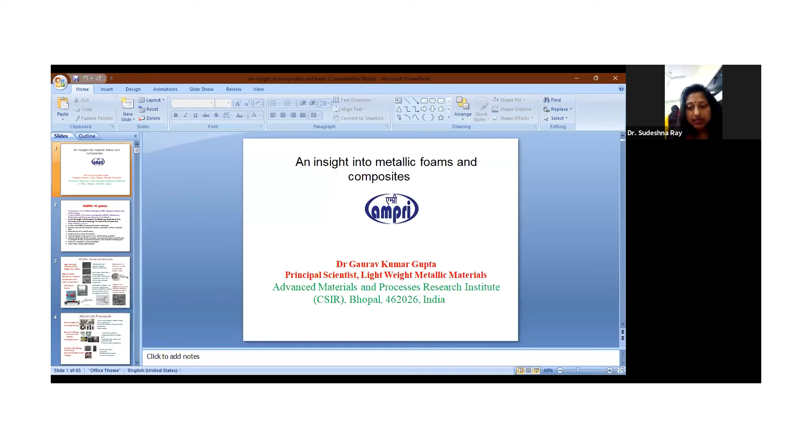So thank you for giving me the opportunity to talk about some of my thoughts amongst all the students and faculties of AISEC Bhopal. So my topic of today's talk is an insight into metallic foams and composites.

So first I will give you some brief about AMPRI. It has been established in 1983 as RRL Bhopal, and in year 2009 the name has been changed to AMPRI, that is Advanced Materials and Processes Research Institute. We have almost 40 scientists, covering all fields: metallurgy, mechanical, civil, and other areas.

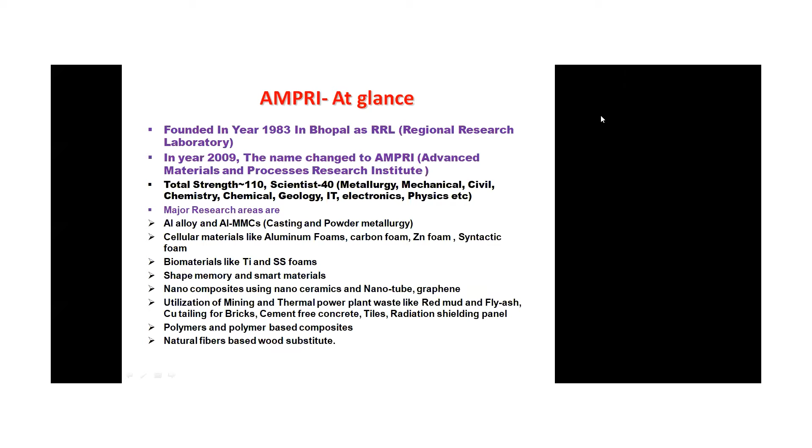The major research area of AMPRI, my department, is basically aluminium alloy and composites by both powder metallurgy and casting. We are working on cellular materials like aluminium foam, carbon foam, syntactic, stainless steel, and others. We are also working on biomaterial foams for biomedical applications like titanium and SS. We are working on shape memory alloys and other smart materials.

Some of the group is working on nanocomposites using nanotubes and graphene. We are also utilizing bulk mining waste like red mud and fly ash, and we are making cement-free concrete tiles and other things. One division is also working on polymer-based composites, and one division works on natural fiber, taking jute and sisal to make wood substitutes. This is a brief introduction of AMPRI.

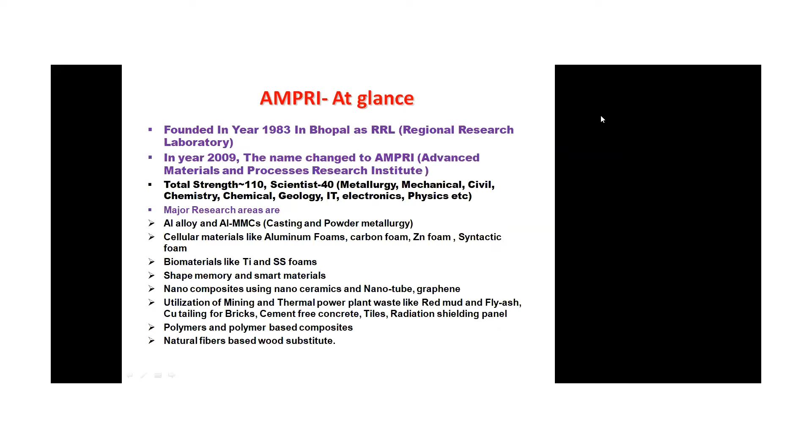Applications of these materials are in the automobile sector, like steering wheel, bracket, control arm. In case of composite, they are brake drum, brakes, connecting rod. In case of foam, applications include crash box, door insert, armor, blast resistance panel. We are already working with some automobile companies to make a composite brake drum for automobiles.

Normally a brake drum is made by the casting route and is made from cast iron. We are replacing it with aluminum composite, and the purpose is to increase crashworthiness, noise and vibration attenuation, and blast resistance property, and most importantly, weight reduction.

Normal cast iron based components have density in the range of 7 to 7.8, but aluminum foam and composite are in the range of even 0.2 to 2.7. The aluminum foam density is in the range of 0.20 to 0.70 gram per cc, and the composite is in the range of 2.7 to 3.2.

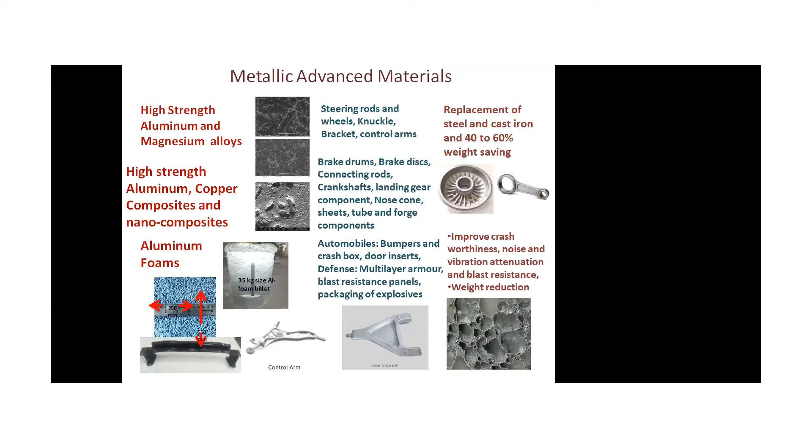We are also working on new processes like electromagnetic forming and joining. One of the colleagues is working on dissimilar metal joining by pulse metal forming, so we can join any two metal sheets which differ in density, differ in Young's modulus, differ in melting point. We can directly join without any heating, just by cold giving electromagnetic force, and then we can join it.

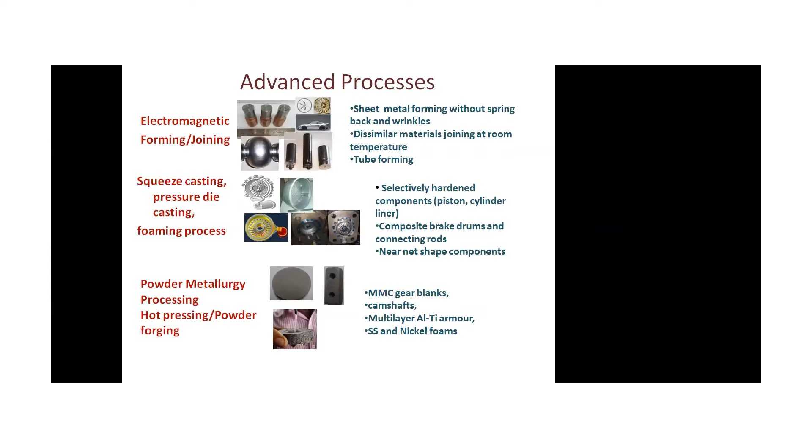We can make many components like wire tubes and many tube forming, and we are also working on making automobile components by squeeze casting and pressure die casting. We are also working on powder metallurgy processing to make components like foam, high temperature foam, armor, and other things.

We are using hot pressing and powder forging technique. We have a very good facility for heat treatment, with expertise for heat treatment of ferrous and non-ferrous materials. And we can also make the deformation mapping of many alloys and composites.

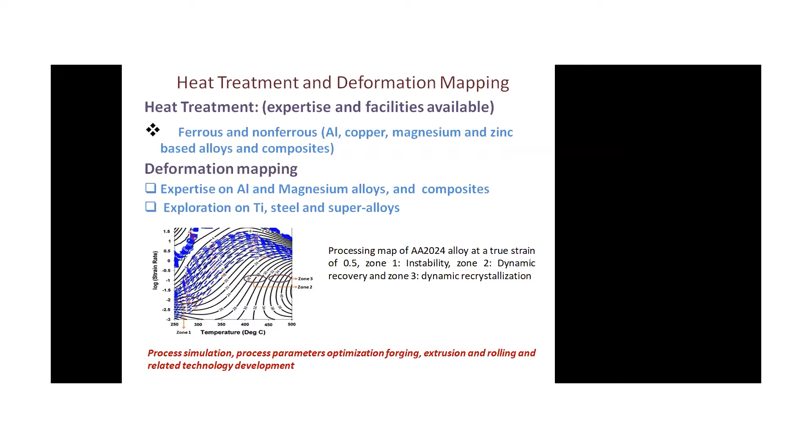Deformation mapping is nothing but, during the deformation of any metal system, finding the best optimum temperature and optimum speed by which we can deform the material without any failure. So this is called deformation mapping. We have generated many deformation maps of aluminum alloys and composites, so we can do this kind of work also.

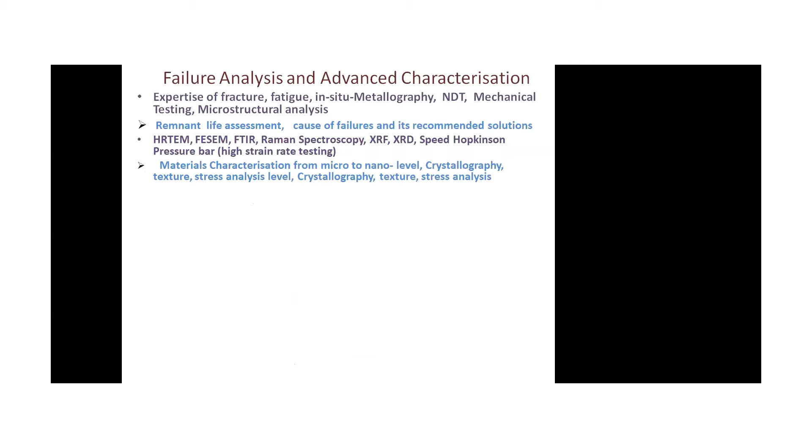We have expertise in fracture, fatigue, in-situ metallography, mechanical testing and other things. We can also provide life assessment of any component. We have HRTEM, FESEM, Raman, XRF, XRD, and we have recently purchased the split Hopkinson pressure bar for high strain rate testing. We can do characterization from micro to nano, crystallography, stress analysis, and many other things.

Now let's come to metallic composites, and we will see this kind of approach: first the classification, reinforcement phase, property, and other things. A composite is nothing but a material system composed of two or more physically distinct phases, where the combination of both phases generates an aggregate property that is different from the constituents.

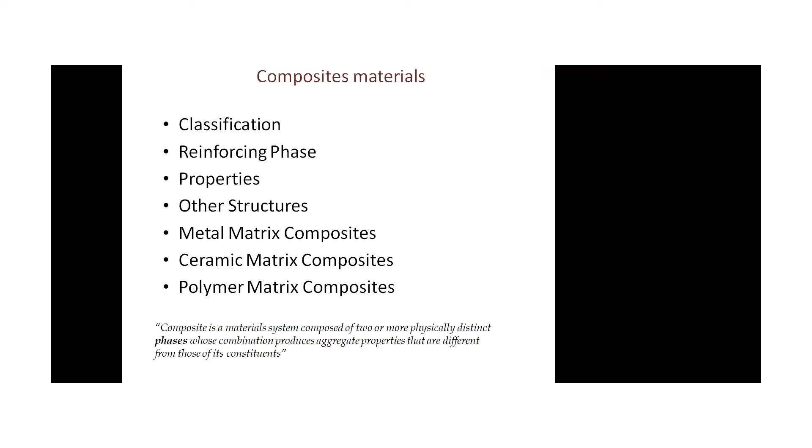Meaning we are adding two different kinds of material systems, either metal, ceramic, or polymer. We mix two material systems, and the overall property of this combination generates a new property which is different from the constituents. Basically, it's in between, you can say.

Composite material examples include, nowadays even the natural composite wood, which is lignin with cellulose fiber. In your vehicle, the tire is basically rubber mixed with carbon black. We are much into plastic and polymer fiber composites, mostly used in automobile components, aircraft, and other applications.

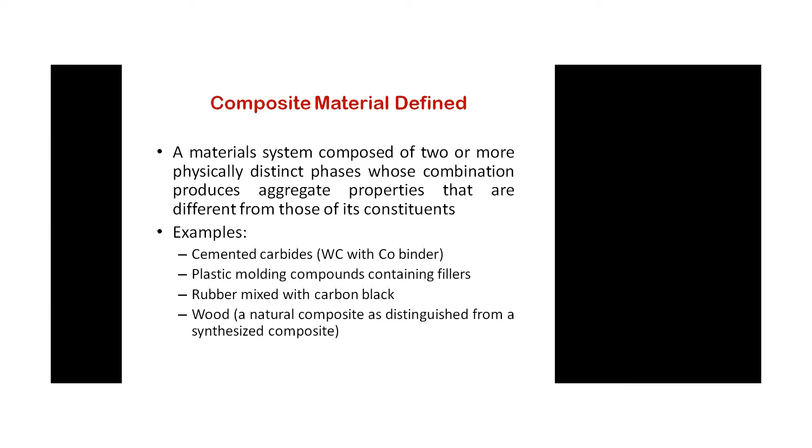Why are composites very important? They are very strong and stiff. Of course, they are light in weight, and because we are adding a hard particle into the softer particle, the density won't increase too much, but the strength and other properties will increase. So we can have a very high strength to weight ratio, and higher fatigue property and toughness also.

And in composites, since multiple materials are there, it doesn't corrode like steel, and we can make many components, and generate many possible combinations of properties which cannot be attained by simple components like metal, ceramic, or polymer alone. But if we make composites, we can achieve combinations of properties.

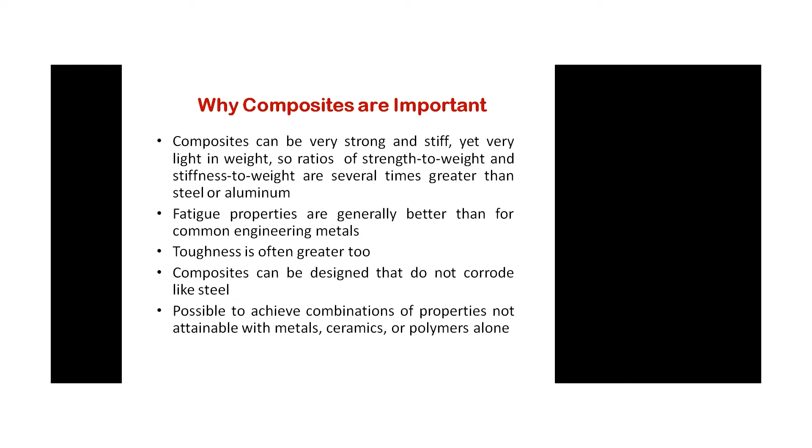For example, metal has lower hardness, but if you add ceramic into it, it generates hardness. Also, polymer is a very soft material with very low properties. If you add fiber, ceramic fiber, or some other fiber, it generates Young's modulus and strength significantly. So this kind of thing is there.

Of course, if there are advantages, there are also some disadvantages. One disadvantage is that if you add reinforcement into the composite, it may generate properties in an anisotropic manner. If you add fibers, the property in the fiber direction will be higher compared to the transverse direction. This can sometimes be an advantage or a disadvantage.

And of course, manufacturing is difficult. A simple polymer or metal can be easily shaped or formed, but manufacturing, shaping, or deforming a composite is very difficult, and they are expensive.

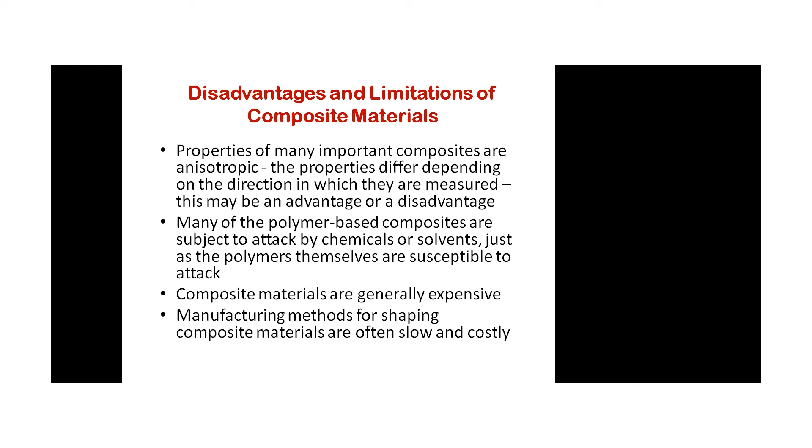So there are two kinds of composites: traditional and synthetic. Traditional composites, like wood and concrete, we have been making for a long time. Synthetic composites, we have been making for the last 50 to 100 years, in a manner where we design a desired structure.

First, we model what the structure of the composite could be, how ceramic or other reinforcement can be added into the composite, what properties we can achieve, and what the geometry should be.

Many industries are making synthetic composites for many applications. Most applications are in aerospace, automobile, general engineering, turbine blades, and electrical applications also. So many applications are there.

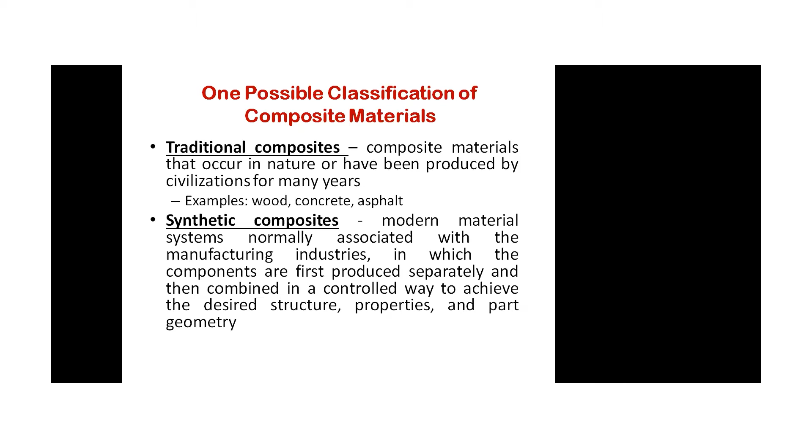Composites can be classified in different ways. There are three types of composites. One is particle reinforced, where we add the reinforcement in the form of particles, small particles, maybe micron size, nano size, even mm size. Both kinds of particles are possible.

Another category is fiber reinforced, meaning we add reinforcement in terms of fibers. The third is structural, meaning both the reinforcement and the base material are more or less the same size.

In case of particle reinforcement, there can be large particles, like in concrete, where we add aggregate as large particles. In normal metal matrix composites, we add nano size or micron size dispersions, which is called dispersion strengthening.

In case of fiber reinforced, it can be continuous fiber, meaning very long fiber, or discontinuous small fiber. A small fiber can be of two kinds: aligned, meaning aligned in one direction, or randomly aligned.

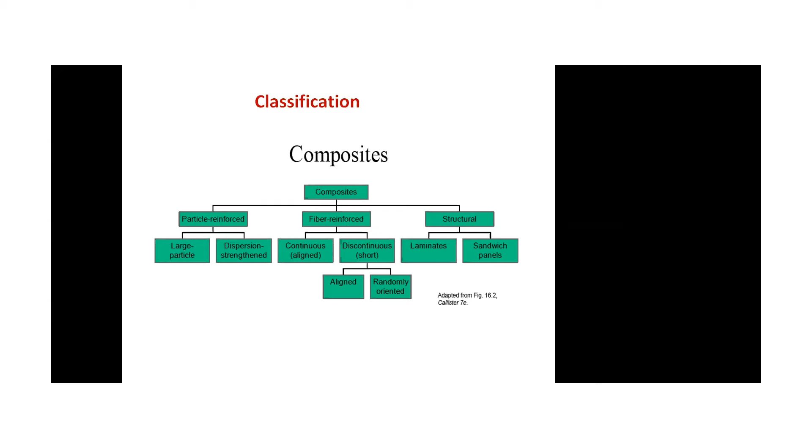And structural composites are laminates, meaning layer by layer formation, and another type is sandwich panels, where the reinforcement part is in between and the matrix part is small, in the form of a sheet. So this is the classification.

And you can see the primary phase is called matrix and the secondary phase is called reinforcement. In the primary phase table, the primary phase can be metal, ceramic, or polymer, and the secondary phase can also be any of the three, but only certain combinations are possible.

The reinforcement should always have higher properties, except in one case, like cermets. In the case of metal, where the primary phase is matrix and metal is also the secondary phase, this is made by powder metallurgy. One metal can be softer like aluminum and the other metal can be iron, so we can add it by infiltration.

In case of ceramic as a primary phase, the secondary phase is nickel or cobalt, which is basically added for increasing the toughness of the ceramic.

And the polymer metal application is where your brake lining and some molding compounds, like the gas pipe you are using in your houses, are made from polymer, reinforced with steel wire. This is polymer metal. In case of metal ceramic composite, our laboratory is making this a lot, because we work heavily on metal ceramic composites.

We are adding lots of ceramic particles in terms of nano size. We are even adding nanotubes, graphene, and other nanoparticles. We are also adding fibers of silica or alumina into the metal. So this is the metal ceramic case.

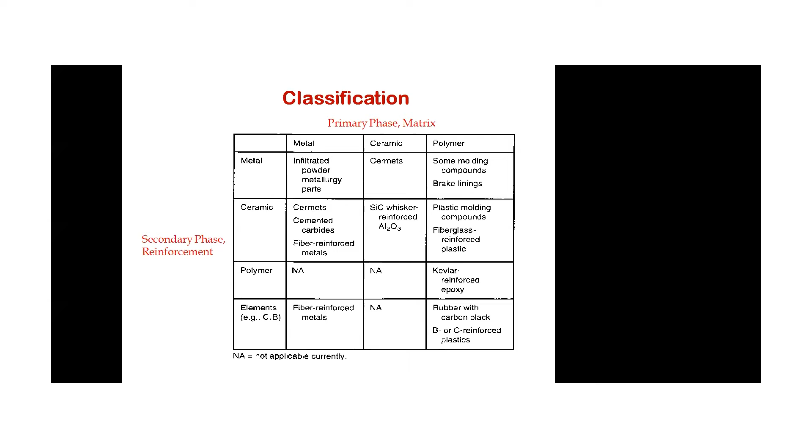In case of polymer, you can use one polymer as a soft phase like epoxy and Kevlar, or other high strength polymer can be added as reinforcement. They are used for armor applications. This is most of the classification.

Then three kinds of composite are possible. One is MMC, which is nothing but your metal matrix composite. Then CMC, ceramic matrix composite, and PMC, polymer matrix composite.

So the purpose is different. For MMC, we are adding the ceramic to increase the yield strength, creep resistance. In ceramic matrix composite, because ceramic has lower toughness, we are adding metal or other things to increase the fracture toughness so that the crack won't propagate.

In case of polymer matrix composite, we are adding metal or ceramic in order to increase the modulus, creep resistance, yield strength. And we can add any kind of reinforcement in terms of particle, fiber, or structure.

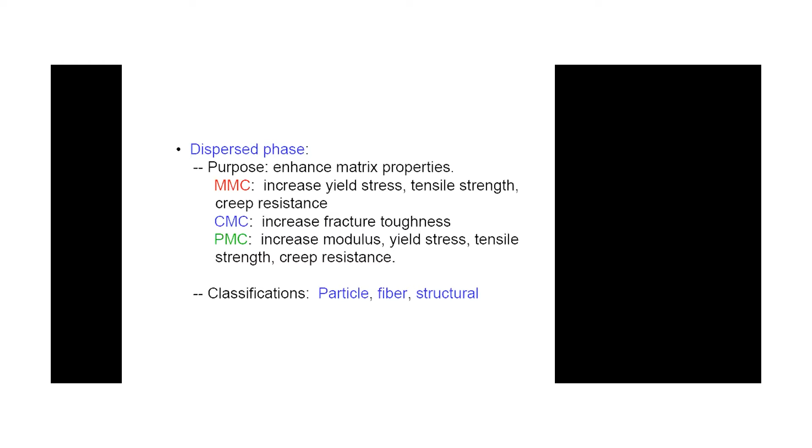The purpose of the primary phase, which is most common, means this is in the higher quantity, is basically to protect the secondary phase from environment. And the primary phase, which is the main phase, transfers the stresses to other phases. This primary phase also holds the reinforcement in its own place.

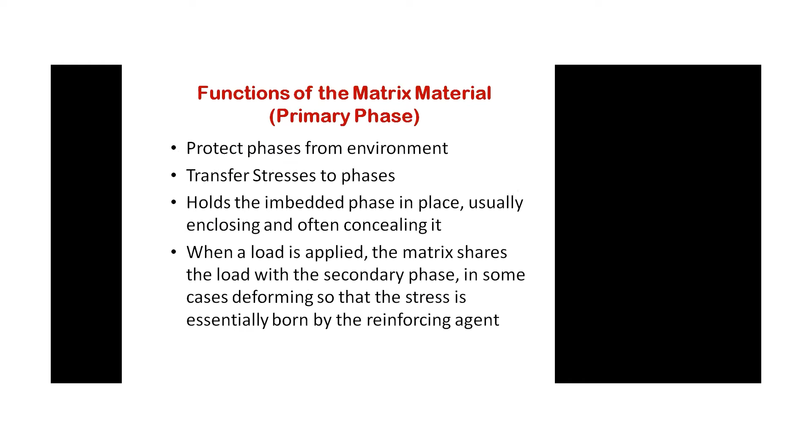And when load is applied, the matrix shares the load with the secondary phase. The primary phase's role is there.

Now other classification, like we are adding different cases, like the composite particles. First is particle reinforced. So concrete is an example of particle reinforced, where the sand and gravel is nothing but dispersion at the macroscopic scale, and cement is your matrix.

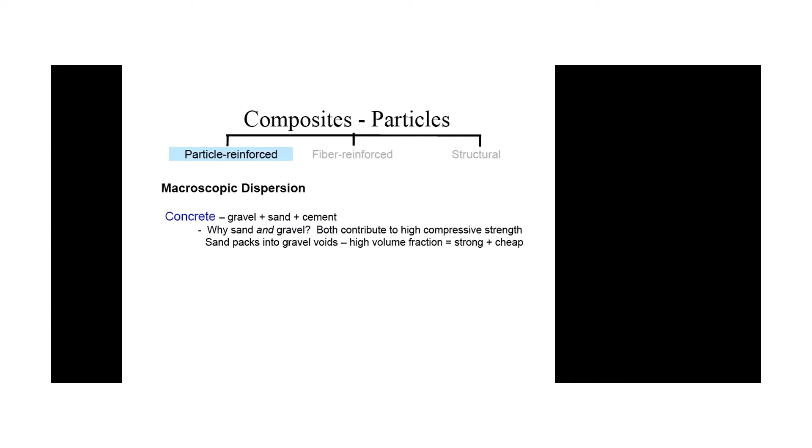And the reinforcement is again there for increasing the fracture toughness and increasing the tensile strength, basically your steel bars. The cement is a matrix, gravel and sand are the reinforcement, and the steel bar also is a reinforcement.

So basically particles are there, ranging from microscopic to macroscopic. You can add flaky particles also, which is nothing but small flat particles. And the particles are distributed randomly because it's particle based. That's why they are randomly distributed.

So we have the property isotropic. It is not aligned, the property is not different. In different directions it is more or less the same.

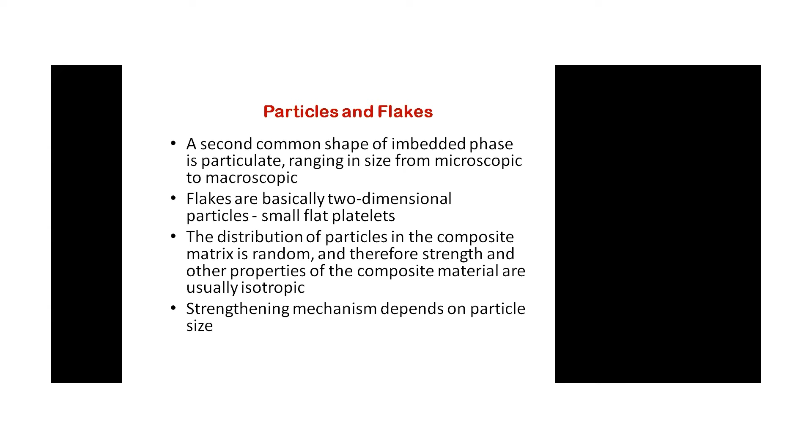And the strengthening mechanism depends on the particle size. The finer the particle, the more the strength of the material, because of Zener pinning and other dispersion hardening mechanisms working there. So as you decrease the particle size from mm to micron or micron to nano, the strengthening is different.

In case of fiber reinforcement, we are adding fibers. Actually fibers are very strong as compared to bulk material. If you make a fiber of any material and compare it with the bulk property of that same material, it gives you higher property in that direction only, not in the transverse direction.

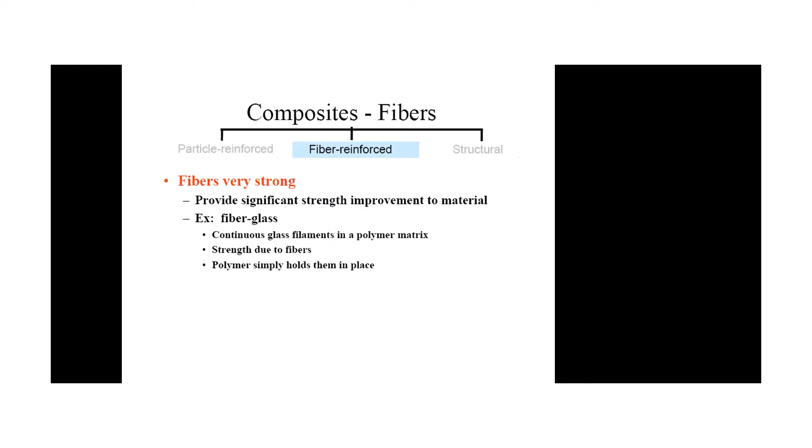So we are using fiber reinforcement like fiberglass. We're adding glass filament to polymer, and we are getting strength because of fiber, and its strength increases. And the fiber is basically the reinforcement material.

Usually they have circular cross section, circular direction, with diameter ranging from even 2.5 micron to 0.13 mm depending on the material.

As I've told you, the filament of any material is significantly stronger than its bulk format. And as you reduce the diameter of any filament fiber, the material becomes oriented in the fiber direction, and the probability of defect decreases significantly. Means the larger the diameter of fiber, the more the defect can be, but as diameter is reduced, the defect will be reduced. So the thinner the diameter of the fiber, the more the strengthening.

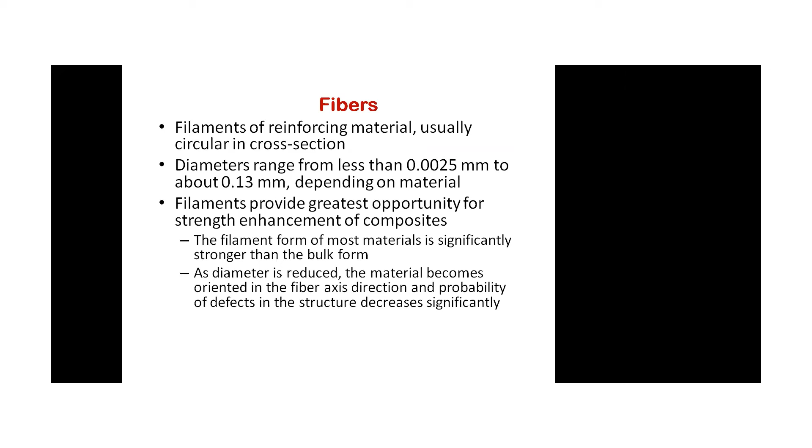Fibers are of three types: one is whiskers, and conventional fiber, and wires. So fiber can also be classified as either polycrystalline or amorphous. Polycrystalline means many grains are present, while amorphous is basically non-crystalline.

So fibers can be alumina, aramid, e-glass, where e-glass is basically glass fiber, and boron.

Polycrystalline fiber, as you know, any polycrystalline material has certain defects at the grain boundary. Because of that, it has lower properties. But any material in single crystal form, without any defects, has much higher properties compared to polycrystalline.

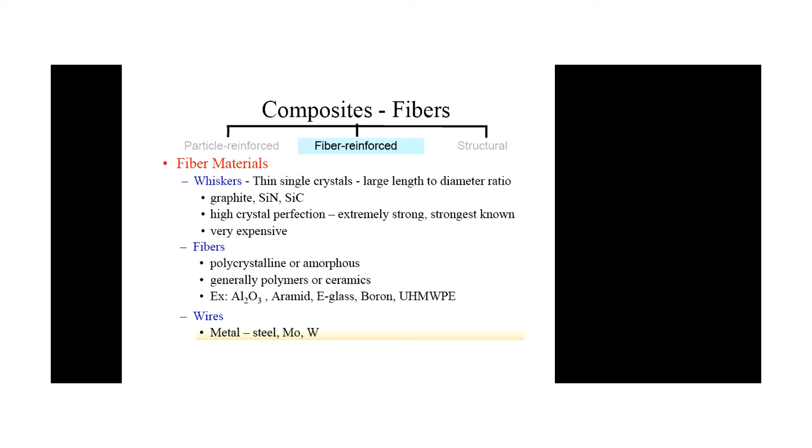So people have made single crystal fiber, called whiskers, of many ceramic materials like silicon carbide and alumina. If added into composites, the strength will be much higher compared to conventional fiber, because they are very strong and have very low defects. But of course, they are very expensive.

For different materials on fiber, glass, as I've told you, is mostly used as filament. Then we are adding carbon also into fibers. Boron, Kevlar and other things are also added for auto or armor applications.

Mostly fiber is used in polymer composites. Some fiber is now also used in ceramic composite and metal composite, but the most common fiber usage is in polymer composite.

If you break the fiber into smaller lengths, it becomes what we call discontinuous fiber. These can be aligned in two ways: either aligned in one direction or in a random direction.

Any fiber which is strong and aligned in one direction has a higher property in the direction of the fiber, but in the transverse direction, it has a lesser property.

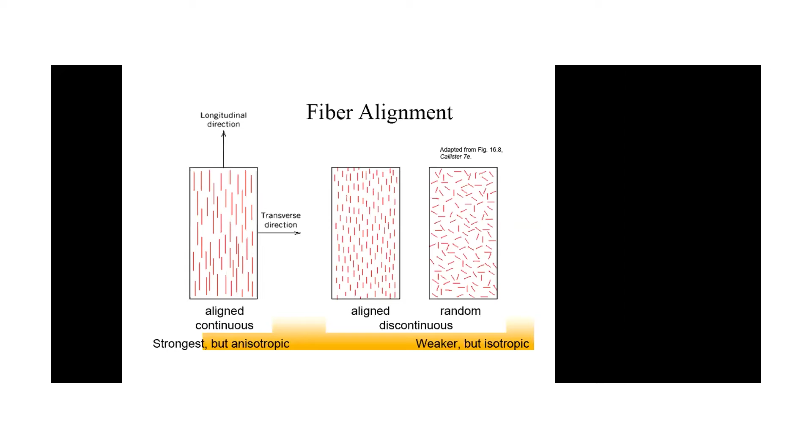In the case of continuous fiber, the property is much higher in the longitudinal direction. For example, a composite high pressure cylinder, like the kind used nowadays.

Our LPG cylinder is conventionally made from steel material, but companies are now making polymer fiber composite cylinders. The advantage is that it cannot burn or blast like steel, and it's very lightweight. This kind of fiber-based LPG cylinder is coming to the market soon.

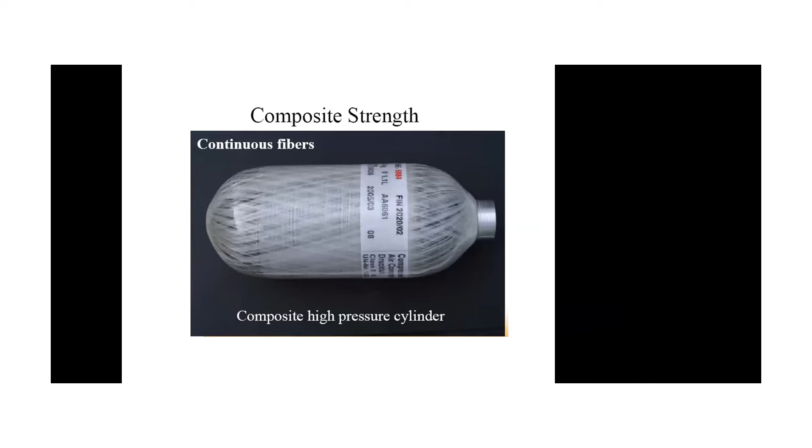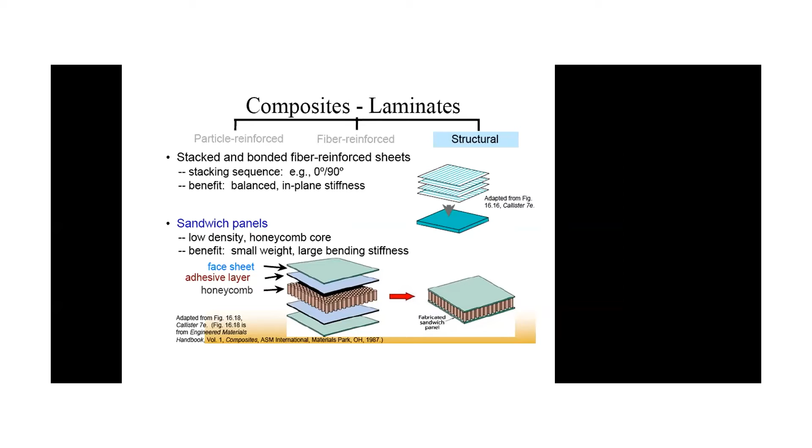A sandwich panel can have either a laminate structure or a honeycomb structure; both are possible.

In laminate composites, for example, automotive tires are made from multiple layers of rubber. Then FRP: in aircraft and automobiles, they make fiber cloth or fiber sheet, multi-layer fiber sheet, and put plastic layers in between to make the component. Snow skis and windshield glasses are basic examples of laminate composite, where the reinforcement and the matrix are of the same size.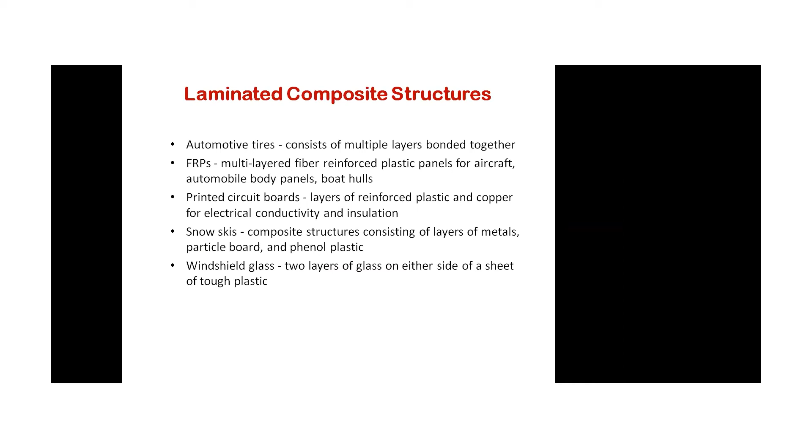Now metal and ceramic composite - I have told you that in case of cermets, the ceramic part is basically tungsten carbide, and it is contained in metal matrix, and it is used for cutting tools and other things.

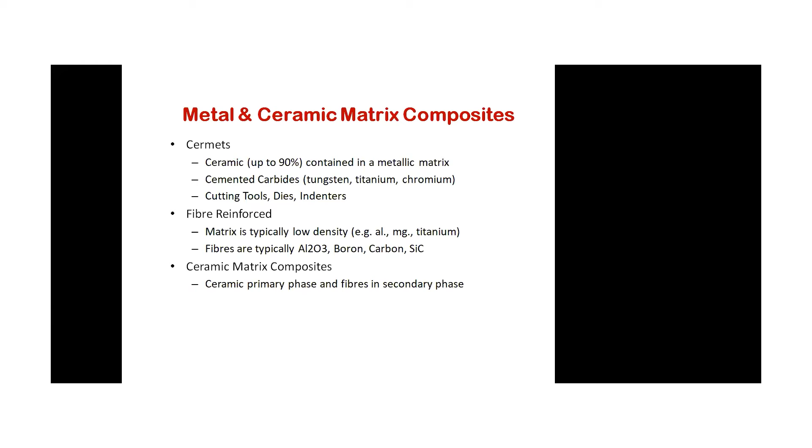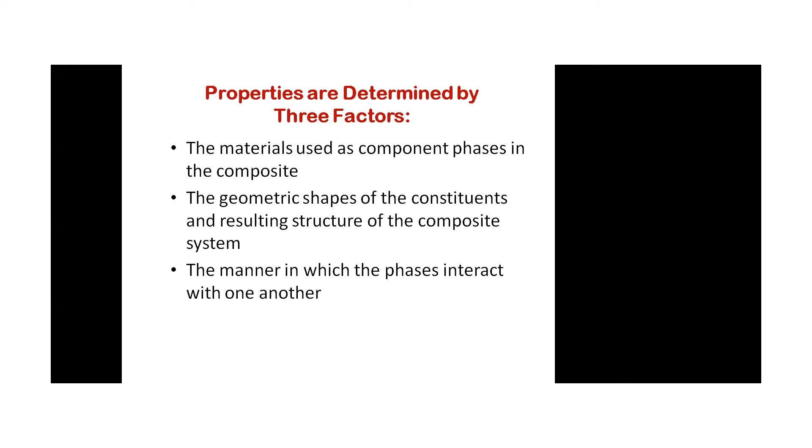The property of composite is decided by three factors: what components you have used in the material, what is the property of matrix, what is the property of reinforcement, and its geometrical shape - whether particle shape, fiber shape, or structural shape - and how they interact with each other, how the load transfer happens. All these factors are basically interfacial bonding - how the phases interact with each other, nothing but interfacial bonding between matrix and reinforcement. So all these factors decide the overall property of your composite.

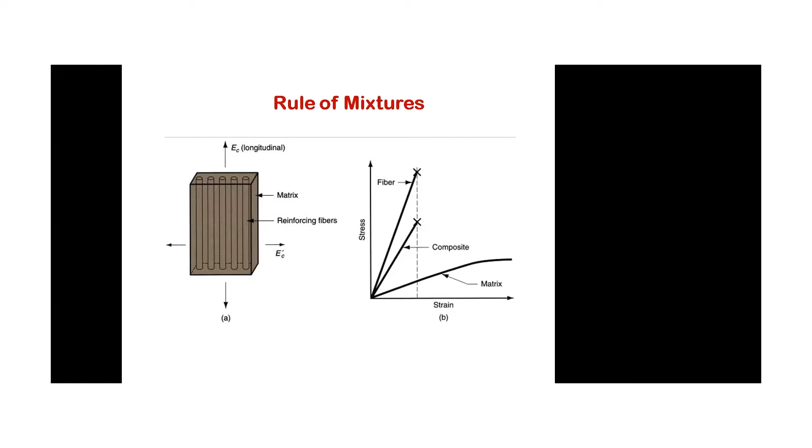There's a rule of mixture that fiber has very high strength but low strain, and matrix has very high strain but low stress. If you make a composite, its property is in between.

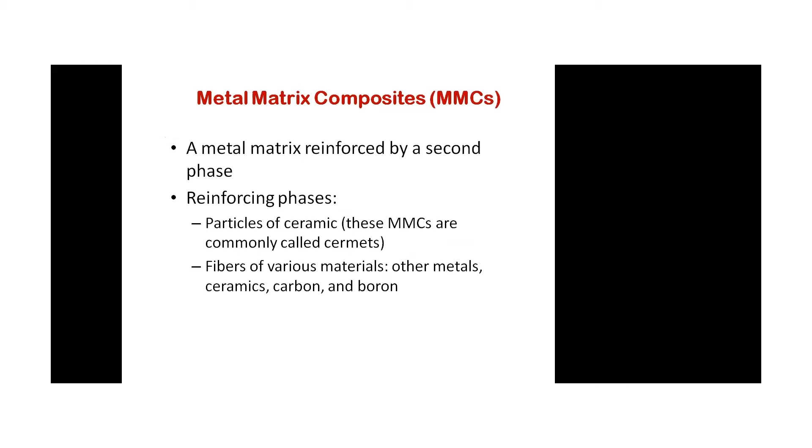Now I come to the metal matrix composite - nothing but metal reinforced with secondary phase. Now we come to what work we are doing in metal composite. So we are working on metal composite for automobile as well as naval application. Both applications we are working on.

For naval application, we are making copper based composite, and for automobile application, we are making aluminum based composite. The application of naval is in the tank, storage vessels, pipes, and other things.

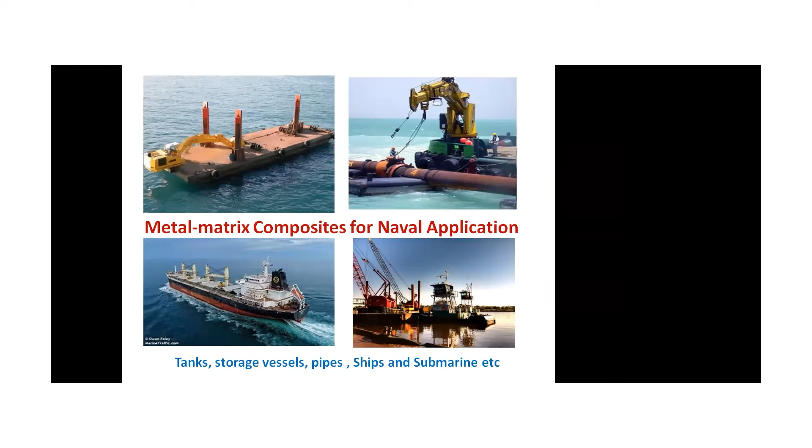As you know, what is the requirement of naval? There are a lot of types of defect and corrosion taking place in the naval part, because it is basically sea water, and sand is also there. So there are many kinds of corrosion happening there - maybe one case uniform corrosion, another pitting, intergranular. There are many kinds of corrosion taking place in the saline water environment.

One of the major factors of corrosion is erosion corrosion, where it is not just the sea water, but the sand is also there near the shore. It is actually causing wear of the component of the ship. Because sea water is already there, it is causing corrosion, but the sand particles and other particles present near the shore - because near the shore the depth of the sea is very less - so there the erosion corrosion is possible. So whatever hulls and seashore fixed structures are there, they are prone to erosion corrosion.

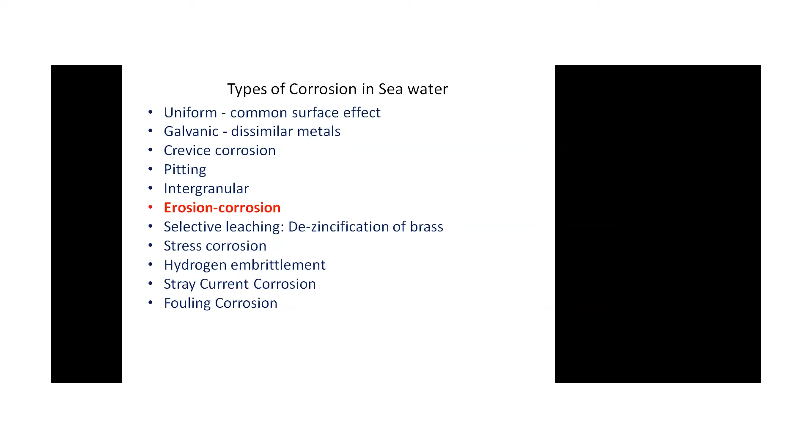As you know, any ceramic particles we add in the matrix increase the tribological property - they increase the tribological strength, meaning wear property. For that, we have added some reinforcement in the copper matrix. Because of this, its erosion corrosion property has been enhanced. This is basically erosion corrosion.

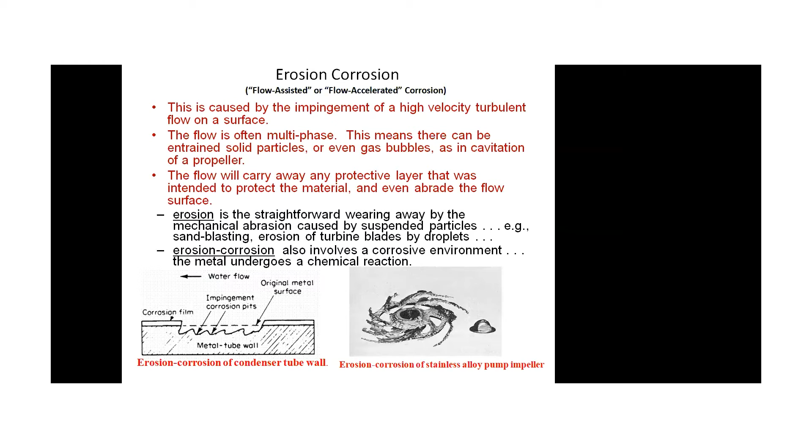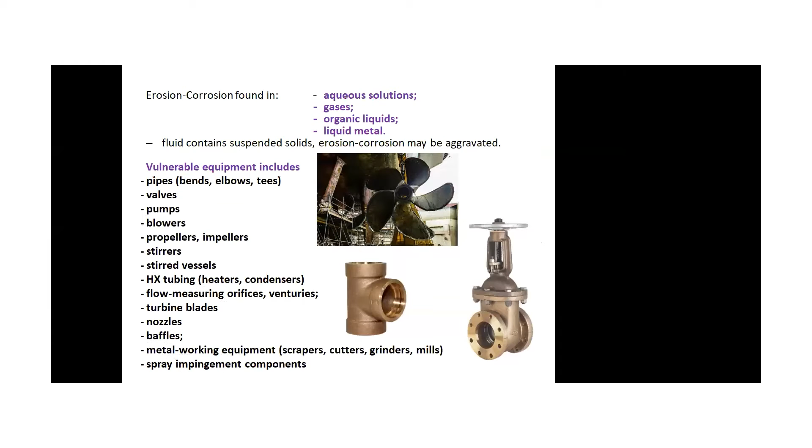It is caused by high turbulent flow on the surface, and it is basically the abrasion of sand or other particles - like corrosion of turbine blades and other things. So it is basically erosion of the metallic surface by mechanical abrasion of sand particles, with corrosion already taking place. These are most of the components where erosion corrosion can be possible - the parts which are submerged in the sea, like pipes, valves, pumps, blowers, stirrers, and other things.

Of course, you know copper is used mostly in the naval sector, because it has very good corrosion resistance in conventional seawater, and very good electrical property. Naval people are using basically copper alloys like aluminum bronze, nickel aluminum bronze, and other things. And of course, if you change the composition, it can change the different microstructure.

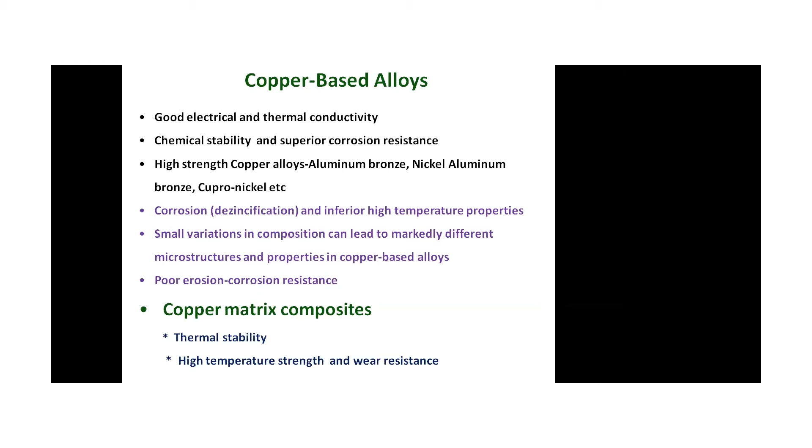But these copper alloys have poor erosion corrosion resistance. They have very good corrosion resistance, but they lack erosion property. For that, we have to add some kind of reinforcement into the copper. If we add any reinforcement into copper, two things will happen: one is thermal stability, because the expansion coefficient of any composite is almost lesser than the pure alloy, and also it will increase high temperature strength, because ceramic particles have higher strength, and also increase wear property.

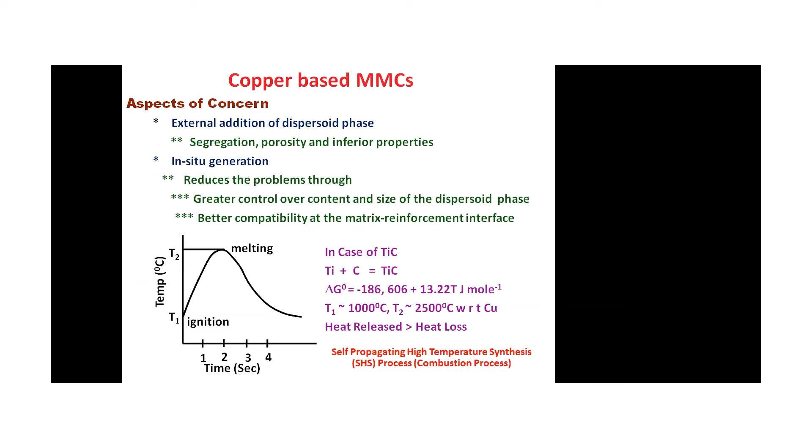So we have added TiC as a reinforcement, and the TiC is generated by some chemical reaction. So it has been added into the copper, and these are some of the micrographs. The conventional aluminum bronze, which is basically a copper, aluminum, and iron based alloy, is most commonly used.

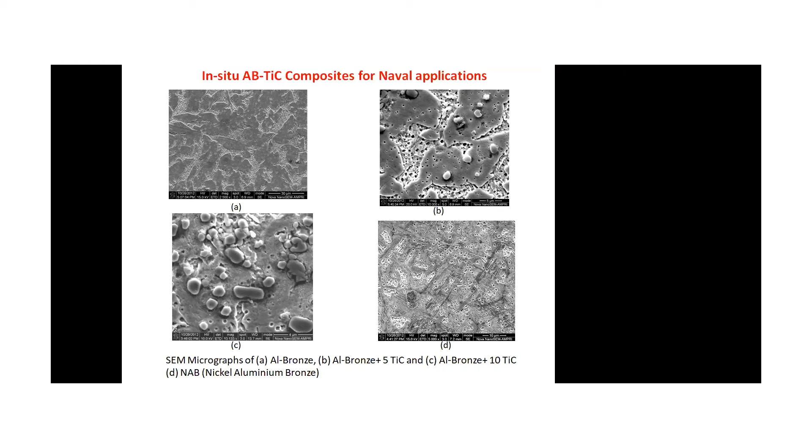We have added some TIC, 5%, 10%, and some other alloy, and compared the properties of conventional alloys like NAB, nickel-aluminum-bronze. This is basically a copper, nickel, and aluminum and iron based alloy. Aluminum bronze is copper, aluminum, and iron based alloy. These are mostly used in the naval sector.

You can see our strength-wise the composite is lesser, because NAB is mostly used in the naval sector. So if you compare the strength of the naval alloy with the composite, property wise...

Young's modulus is increased, but when you make any composite by the casting route, the solidification front is problematic, because ceramic will change the solidification pattern of the metal. So because of some defects that can come in, yield strength will always be higher for the composite, but tensile strength is dependent on many factors.

Tensile strength reduces. But if you compare the wear property of both the reinforced composite and the alloy, you can see the wear rate is highly reduced in case of both conventional wear rate and erosion corrosion. The bottom curves show the erosion corrosion rate of both the alloys. You can see the composite has less wear rate compared to the conventional alloy. And when you compare the corrosion rate in the conventional 3.5% NaCl system, the corrosion rate of the composite is less than the alloy, so corrosion resistance also increases, similar to the wear property.

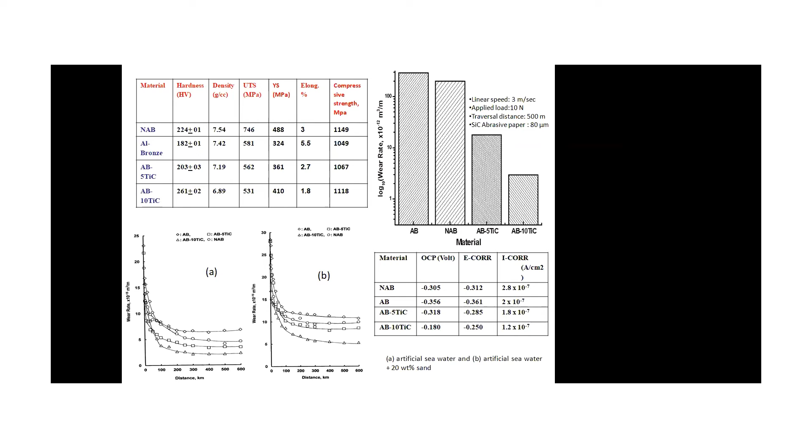So when changing from alloy to composite, we have to see not the strength but the specific strength divided by the density. That is what we have to see, and that shows an increase. Also, compressive strength increases. This is work we have done in one of the projects.

Now come to the aluminum based composite. As I've told you, whenever you add any reinforcement into a system, deformation basically involves dislocation movement into the matrix, and metal is very susceptible to deformation, but ceramics are not susceptible to deformation because they are very hard. So if you add any ceramic particle into a matrix like aluminum or copper, secondary deformation becomes very difficult, and machining also becomes difficult.

If you add this kind of ceramic in the form of very fine particles, like nano size or micron size particles, then it can be easily secondary deformed. But if you add ceramic particles of maybe 100 micron or 50 micron, then it's difficult to secondary process - secondary deformation being rolling, forging, extrusion and other processes. So in order to increase the stiffness, wear property and other properties, it should have very fine particles, and also very high interfacial bonding with the matrix.

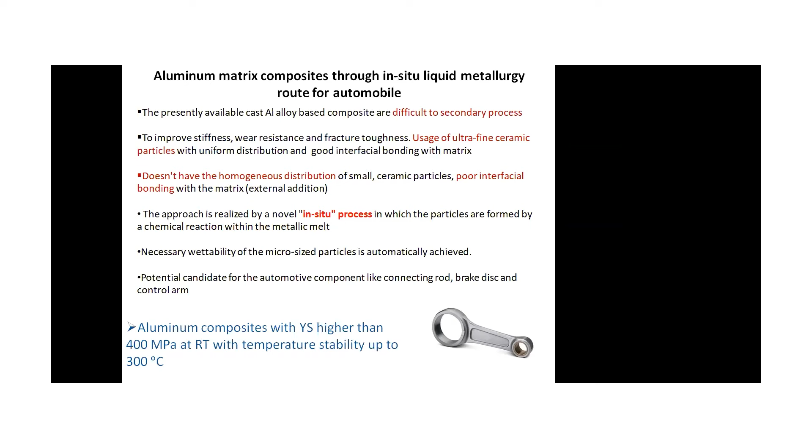That's why in case of aluminum alloy we have also added TIC in the form of an in-situ reaction, and we can make components like connecting rods, brakes and other things, and we have also rolled it. We made the conventional alloy - we took 5083 and made the composite, then rolled it and hot forged it.

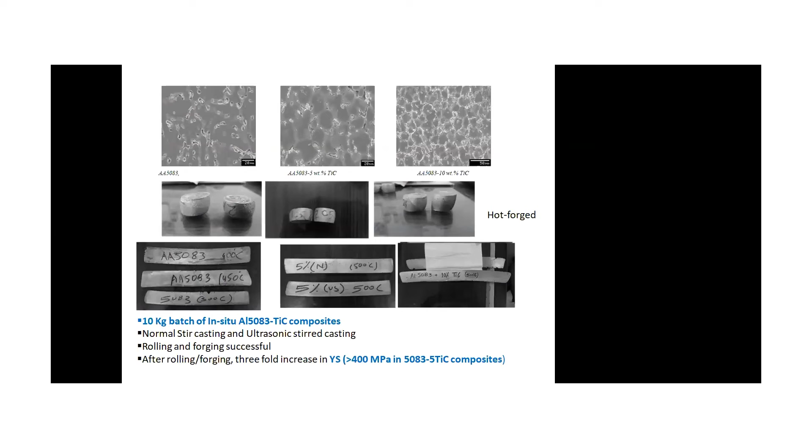We measured the strength in the as-cast condition and after rolling - rolling is very easy, we can easily roll it. After rolling, compared to casting where yield strength is 142, after rolling it is 476, meaning a 3 times enhancement in strength, and elongation is more or less the same - only elongation changes.

It can be proven that if you add very fine particles, the simple alloy, once deformed, only shows yield strength increase up to 306, because any reinforcement acts as a pinning site for the deformation. So very fine grains generate because of the reinforcement, since during hot rolling there is a simultaneous recrystallization and recovery process going on. After recrystallization, new grains form, and this ceramic part acts as a pinning site for new grains.

So for the simple alloy, after rolling you get more or less higher grain size, but after rolling the ceramic reinforcement composite, you get finer grain size, and the particles are also finer. So they act as pinning for the dislocation, meaning this gives you the Zener pinning or dispersion hardening strength.

That's why we have to use finer reinforcement, and finer particles don't create any casting problem. A bigger size reinforcement changes the solidification pattern of the cast during casting, but finer doesn't create any problem, and we can easily roll it, because these particles won't create any problem for dislocation motion.

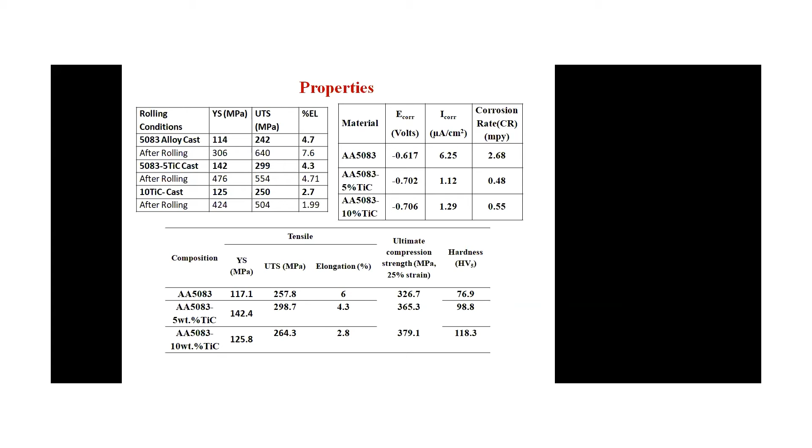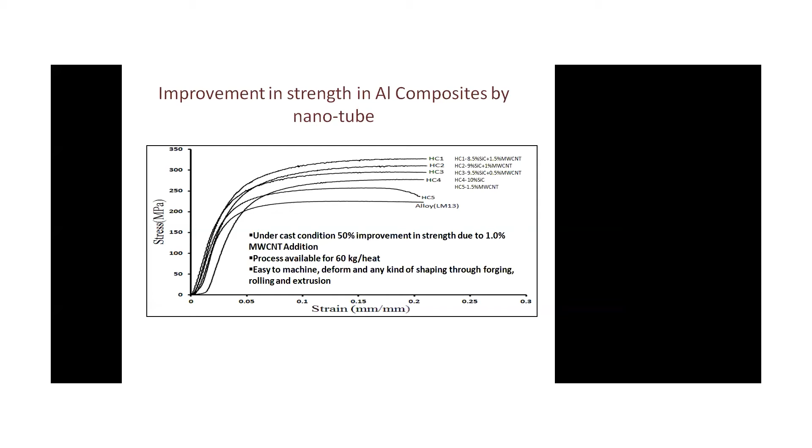We are adding some ceramic into the aluminum matrix, but instead of only one ceramic element, if we add another ceramic element like CNT or graphene along with it in the aluminum matrix - in this case we are adding silicon carbide as well as CNT into the aluminum matrix - we can see if there is only silicon carbide, strength is not so much. But if we add both, then strength is much higher than conventional, because one is causing primary hardening, another causing secondary hardening of the system. So that creates some kind of stress field that increases your strength. This is also one of the works we are doing.

I have told you that composites can be of 3 types: one is particle, one is fiber, and one is structural. This kind of approach is structural composite, where one of the phases is ceramic or intermetallic, and another phase is metallic. This kind of approach is used for armor applications.

So this is the conventional armor plate which is used for soldiers' bulletproof jackets.

As you know, in nature many animals have some kind of protection system, a shell kind of structure on their back or body, which protects them from shock or from other animals. They have some kind of system in their hard shell, which is basically a structural composite - one is the soft phase, one is the hard phase. So this kind of approach found in nature, in animals, is the same approach we have used in our armor system.

Meaning when one layer is soft, like metal, and one layer is tough, basically a hard layer like ceramic, reinforced, or intermetallic - so that's the approach we have used.

As you know, most armor material in vehicles uses steel, armor grade steel, and the requirement of any armor grade metal should be lower weight. Performance-wise it should be the same, but it should have lower weight. So our system, which we have made, has lesser weight but the same performance.

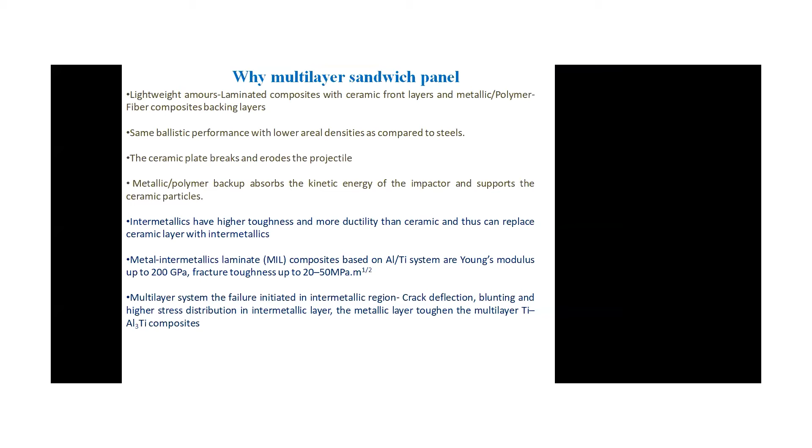Since the projectile is very high energy, the soft ductile part absorbs the kinetic energy of the projectile and supports the other part, which is ceramic. The ceramic part develops cracks and blunting happens there, while the metallic part takes all the stresses, and that way it absorbs the bullet impact.

So you can see we have made an 8 mm sheet like this, and we have done the simulation with an AK-47 bullet, and we have found that it usually absorbs the energy.

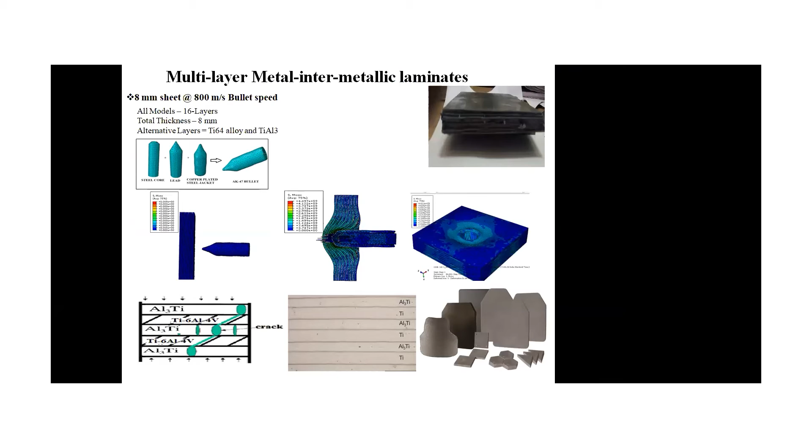Now we come to metallic foams. As you know, metallic foam is a new class of material different from solid material. They are lightweight, basically porous metals, and they have very high impact energy absorption, high vibration damping, and good thermal insulation. They are not solid; they are porous metals, and there are many types of foam possible.

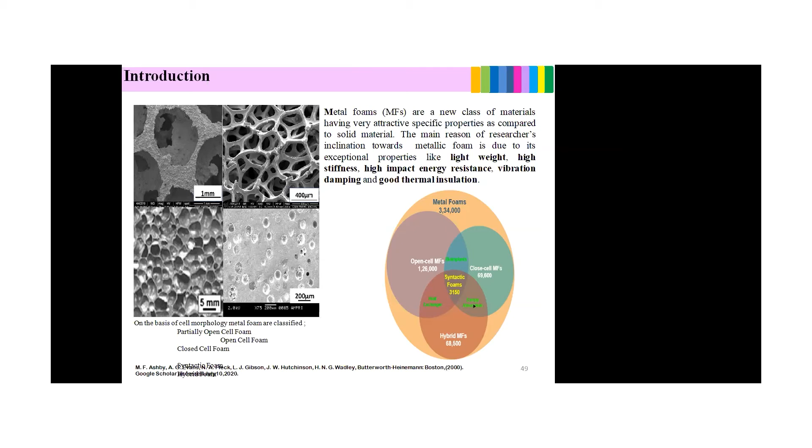One is perfectly open cell foam, closed cell foam, and partially hybrid foam, where a combination of open and closed cells are there. You can see the number of research papers in metal foam are huge—almost 3 lakh papers in metal foam.

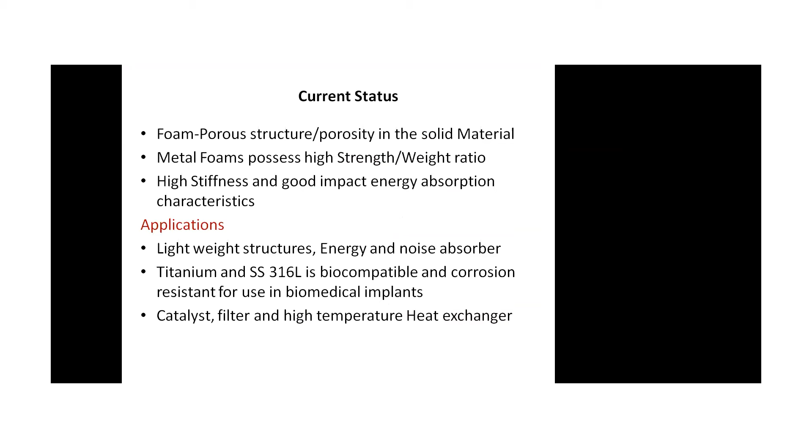Now, what is the current status? Metal foam possesses very high strength to weight ratio. They have high stiffness and high impact energy, they're lightweight, and they can absorb noise. Nowadays we are using high temperature metals like titanium and SS for biocompatible foams and bioimplant applications. They can also be used for filters and high temperature heat exchangers.

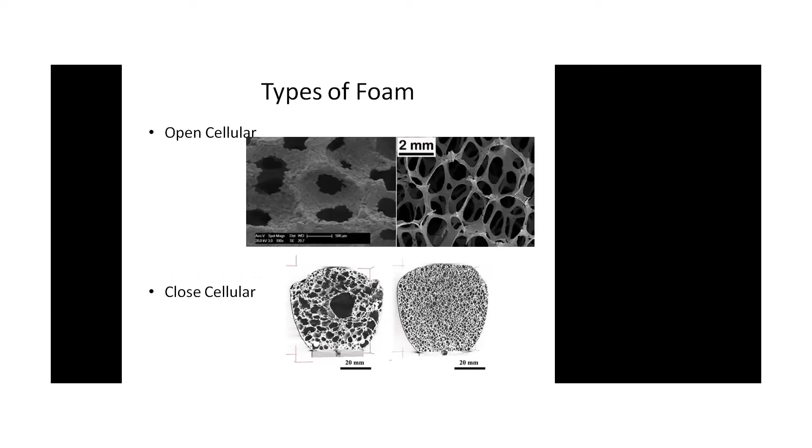In open cell foam, the pores are interconnected to each other. You can see one pore, meaning the pore which is inside from the outside boundary, and from that pore you can see many pores connected inside. In case of closed cellular foam, the pores are isolated, kind of bubble-like pores.

The production technique is basically using liquid metal. For low melting point metals, we use liquid metal and put some kind of gas forming agent into the liquid metal. When they make gases, we have to freeze at that time only. So most of our work in the liquid metal form is made from the liquid metallurgy route.

For high temperature metals like titanium, steel, and nickel, we use the solid powder metallurgy form. We put some kind of material which can be evaporated at low temperature, and then it generates spaces. That's how we do it.

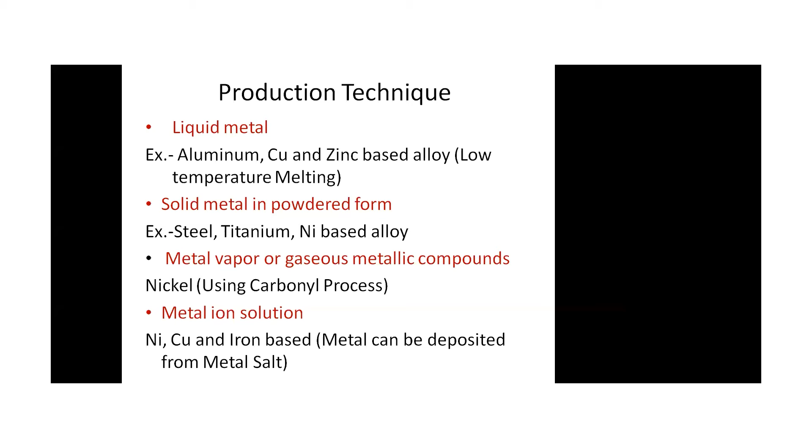Another way, if we get some kind of metal vapor or gaseous metal compound, we can also make nickel-based foam, and of course we can make nickel-copper base foam using the electro deposition route also.

In liquid metal, the processes are direct foaming with gas and foaming with a gas blowing agent—these two things we are doing. Powder compact melting, we are not doing in our lab. Spray forming, then investment casting with polymer foam. In powder metallurgy, we are using sintering of hollow spheres. Gas entrapment, we are not doing. Pressing around fillers, that we are doing. Sintering of powder with a space holder, that we are doing, and reaction sintering. These different methods are there.

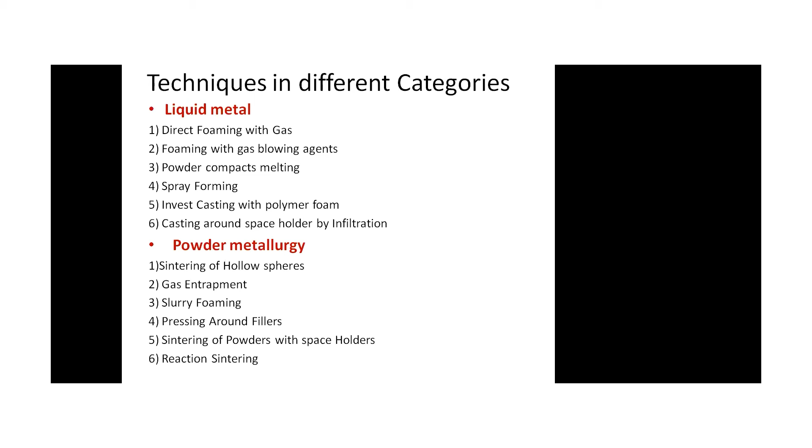There are many applications of foam, like structural applications in the automobile industry, shipbuilding, and machine construction, where we have to reduce weight as well as reduce damping and absorb sound. In the automobile industry, we use it in door panels and front panels where we can absorb energy. In shipbuilding we use it for flooring to reduce damping and sound absorption.

Even in railways we can use this. In many machines we can put it at the base to reduce vibration damping and other effects. In biomedical applications we use foam so that cells can help bone make integral bonding with the material. For functional applications, we use it for filtration, separation, catalytic converters, silencers, and other things where heat transfer and thermal properties are utilized.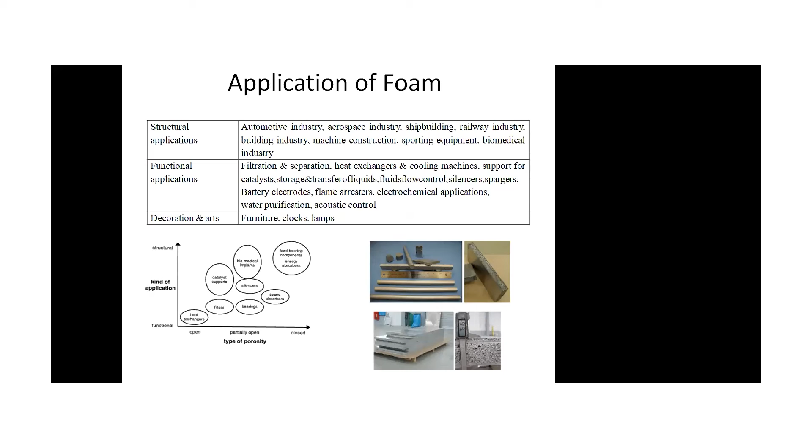In our lab, we are making aluminum foam for many applications, and the density can vary from 0.2 gram per cc to 0.8 gram per cc. We can have a cell size from 0.5 mm to 4 mm. Strength can vary from 2 MPa to 35 MPa. For energy absorption, we can have 50% higher damping efficiency than dense aluminum.

We are making sandwich panels, foam-filled engine brackets, door panels, sandwich panels, and the bottom picture shows we have filled the foam in the crash box in the bumper assembly. We have a capability to make 200 kg of foam per day, and we are making hybrid aluminum composite foam for high-end applications.

We can join foam pieces to make a bigger structure by adhesive joining or welding, and we can make sandwiches. We work on components for crash applications like crash box and bumper, vibration attenuation applications in engine brackets and heavy machinery, door panels, partition panels, and other things. We can also machine the foam.

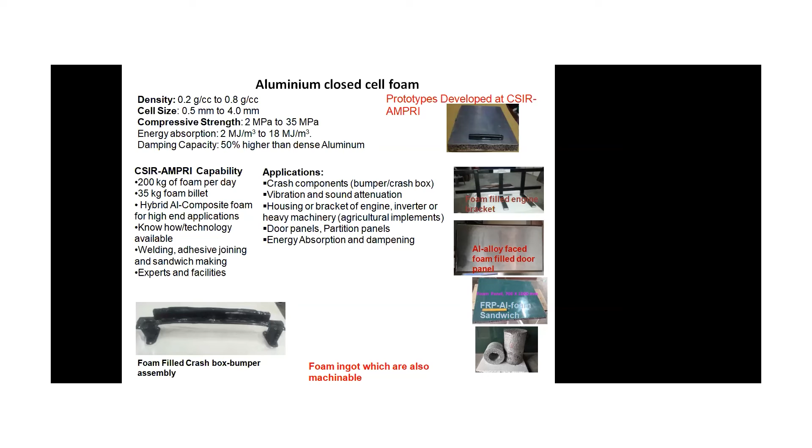After becoming more or less solid, it behaves like a conventional solid material. So until it becomes solid, it acts with a constant stress zone, which is called the plateau zone. So we are making this kind of structure, and you can see we have a strength up to 35 MPa.

We have a mold. We are making the foam in some MS mold, and then we remove the foam from the mold, cut it, machine it, and use it for different structures.

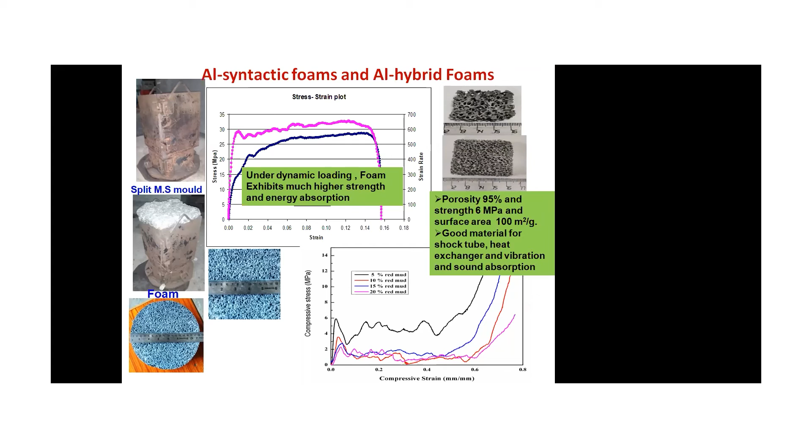We have also got facility for simulation. We have simulated whatever crash box exists in the automobile, without foam and with foam.

We have also tested it under real conditions, putting this crash box under some machine, making some crash analysis with this foam, and measuring the energy absorption. We found that the empty crash box, made from steel, absorbs 9.8 kilojoules of energy, but if you fill it with foam, it can absorb 20 kilojoules.

We also found that if you fill the crash box and bumper with aluminum foam, put this in the car's frontal area, and the car is moving at 60 kilometers per hour with a weight of 1000 kg, then whatever crash occurs, all the foam and crash box absorb the energy, and there is no damage to the structure, either engine or passenger.

All the crash energy can be absorbed by the foam material, and this is already the European standard for what the car crash energy absorption should be for a very good car manufacturer. We checked that European standards require a good car to absorb 135 to 165 kilojoules of energy if it crashes, and our foam-filled crash box can absorb 200 kilojoules of energy.

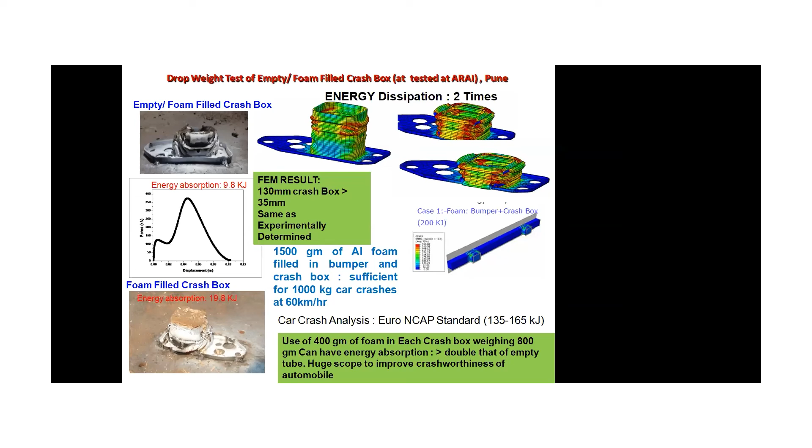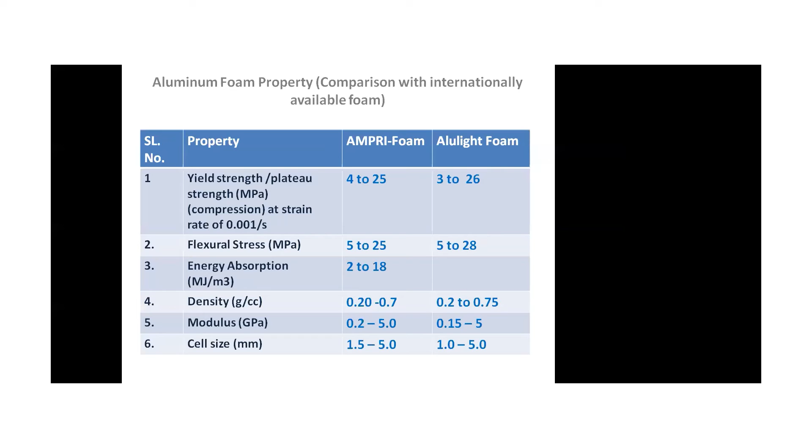If you compare our foam with international standard foam, you can see that our foam is more or less the same or higher in strength, same energy absorption, and comparable density. So these are examples of closed cell foam for energy absorption.

But we are also making open cell foam for functional applications like EMI shielding, filtration, and heat transfer. There we are not measuring strength, but we are concerned about surface area and thermal conductivity. This thermal conductivity is very high, so we can use it for heat transfer as well as EMI shielding applications.

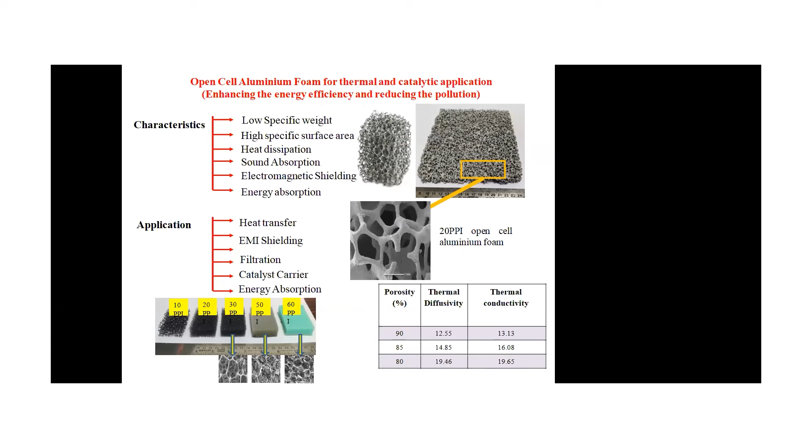The same thing we have made for a cooler, so we can make a cooler using open cell foam because the heat transfer rate is very high. We have made a kind of cooler where there is physically no cooler, but we put open cell foam into a perforated sheet or metallic net, and we just fill the upper tank with water, which drops onto the foam. It basically evaporates very fast.

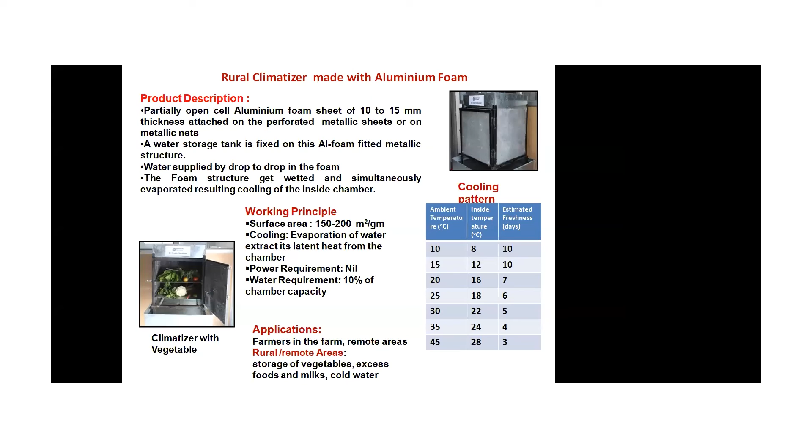The same approach, we told you about the sandwich panel kind of composite shape. Here also, if we make aluminum foam in between and put aluminum alloy and ceramic on both sides, then we can use it for multi-layer armor for defense applications.

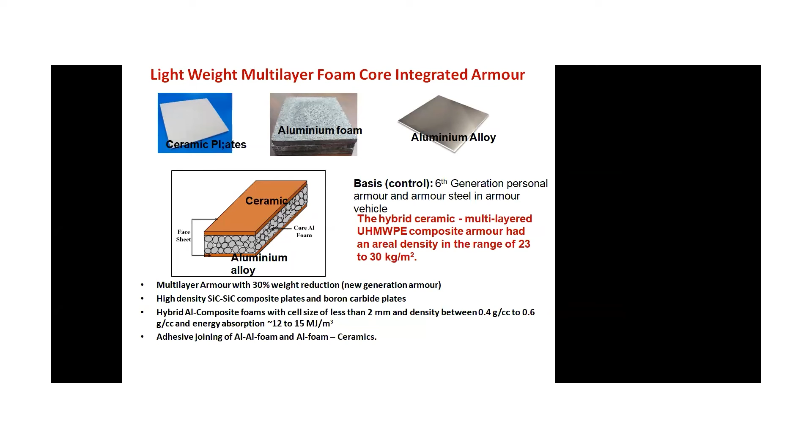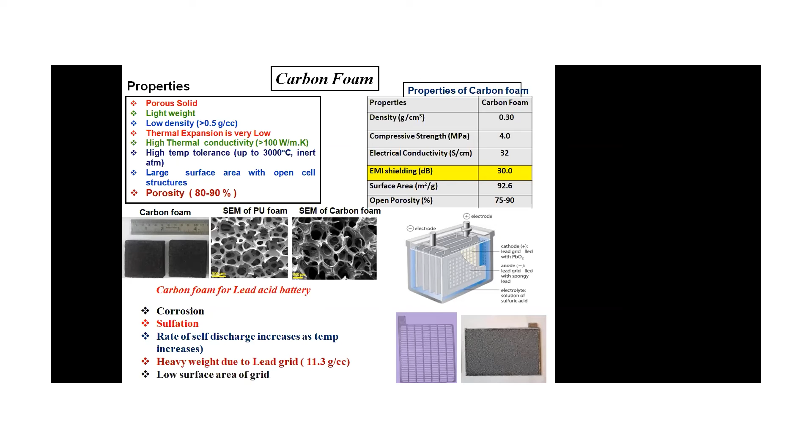We are also working on carbon foam. Carbon is a very lightweight material, and here the carbon foam is for functional applications, like lead acid batteries. Lead acid battery is used for rechargeable batteries, but lead is very heavy and the life of lead is very low, with issues like corrosion and sulfation. So if we decorate lead onto the carbon foam, we can use this electrode for lead acid batteries. This is a very good application of carbon foam.

I told you that foam can be made by two routes. Either you generate gases in the metal part, or you add some kind of hollow sphere into the metal. One way is to add the gas or gasifying agent to the metal, which generates bubbles, and then we freeze it to make foam.

Another way is to add hollow spheres, like stainless steel or nickel or other spheres, directly into the metal. In the conventional way of making foam, the pores are not uniform in size and not isotropic, and porosity may vary from one point to another. But by adding hollow spheres to make metal foam, the property becomes isotropic, and strength-wise it is much more than conventional foam.

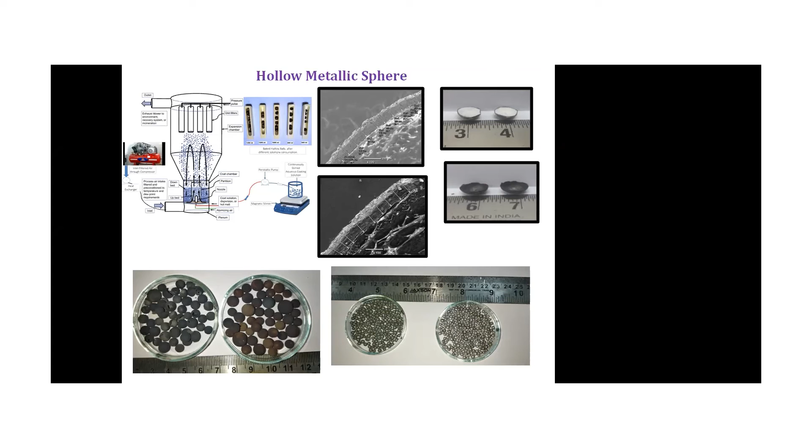That we are making by some method. You can see we have used a hollow sphere. When we cut it, you can see this kind of structure. This work we are doing currently.

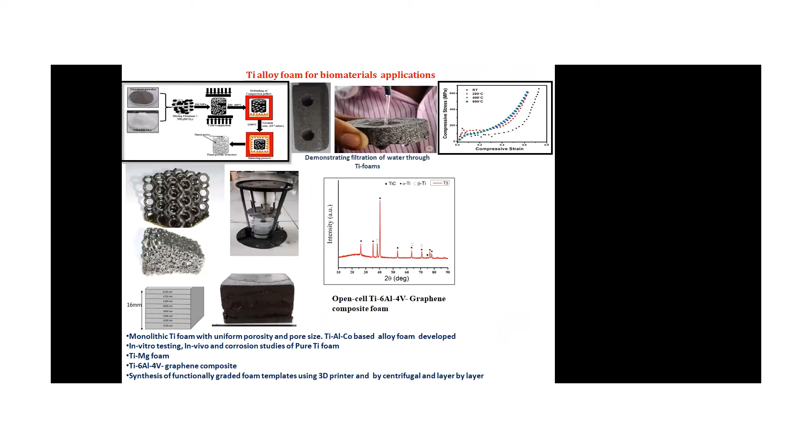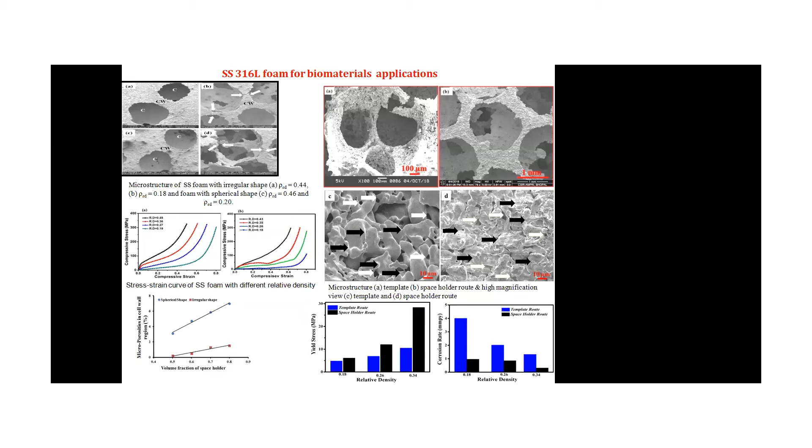Apart from conventional aluminum foam, we are also making foam for biomedical applications like titanium foam, using the powder metallurgical route. We are making it for 3D printing also, and doing biological testing as well. We are also making stainless steel foam in various porosities, measuring its strength, corrosion property, and its cell behavior in biological conditions. This is all from my side.

So thank you, if you have any question.